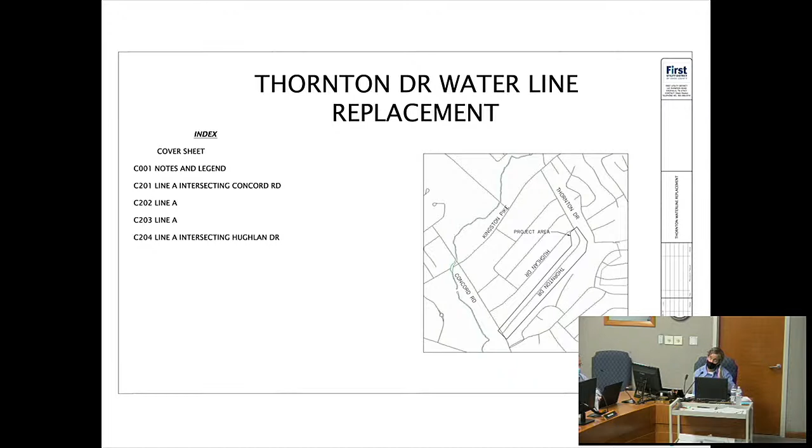This item basically involves replacement of an existing 6-inch PVC water line along part of Thornton Drive, from Concord Road all the way down Thornton to where it starts to curve north toward Kingston Pike. You can see it there on the screen. It's being replaced with a new 6-inch ductile iron pipe, and First Utility District would be doing all the work. They would be boring a 2-inch HDPE water line across Concord Road to connect to the existing line.

Really all this project is being done for preventative maintenance of their water distribution system. There's a representative here from First Utility if you have questions. Staff recommends approval of this utility project, subject to coordinating erosion control and traffic control as part of the right-of-way permit, and then providing the town with an as-built of the replacement line, so that for future road projects or utility work we know where the line is and don't damage it or have conflicts.

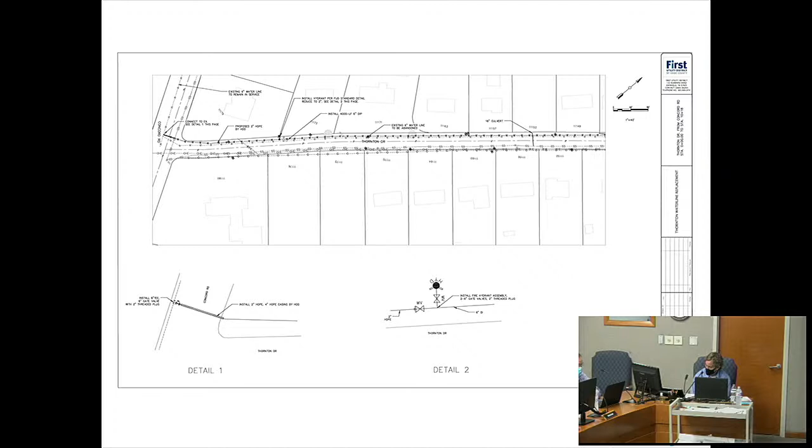So with that, if anybody has any questions, either myself or Edwin. I have a question. Okay, tell us who you are and give us an address of your business. Yes, ma'am, I'm Edwin Deaton. I'm in the engineering department at First Utility District, 122 Durwood Road. Thank you.

Yes, sir, my engineering question. You're going from the 6-inch to 2-inch back to the 6-inch. What's the rationale behind that?

We're replacing a 6-inch line. It's an in-kind line replacement from Hughlan Drive coming back around to Concord. Currently at Concord, we have a dead-end line that does not interconnect on the west side of Concord, so we're eliminating that dead end and just boring a short line across to make a loop. I guess what I'm trying to understand is why it's 6-inch to 2-inch and back to 6-inch.

Not to get too much in the weeds, but this is currently a 1-street wide pressure zone. We have 1 street on 50 PSI lower pressure. It's operated well and provided fire protection for a long time. We're going to replace that in kind, and we're eliminating the dead end simply to not have to go back and do flushing and maintain chlorine in that line. So we're simply connecting it with the tube because that's all we need to do to eliminate the dead end, and it's quite a bit cheaper than boring a 12-inch steel casing across the road.

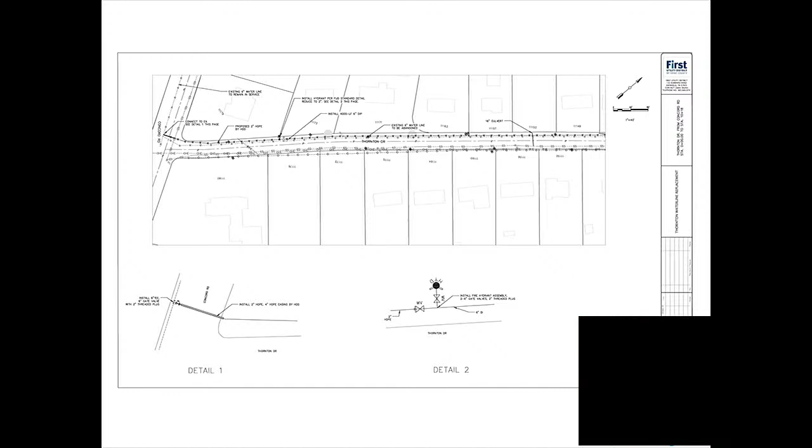Sure thing, understand. Will water service be affected for a certain time for the residents in that area? There will be scheduled outages just to swap the services over. The existing line will remain in service until the new line is tested and disinfected, and we're ready to transfer services individually for each customer.

And you'll be informing the customers of this? Yes, ma'am. Okay, thank you. And you're abandoning the other line after you get the new one up and going? Yes, sir. Okay. And Edwin, are you going to do new yokes and meters, or tie in to the old yokes and meters?

We will likely set new meters and boxes next to the old ones. Those have been there a long time, 60 years old, so we're going to go ahead and swap those over, and then we'll make the connection to the customer's existing service and pull the old box.

That's the other thing I was going to get at. It may really confuse a homeowner when they have 2 boxes in their yard. The ones we have now are old concrete, so we'll take those out, fill it with gravel, seed and straw it. Perfect, thank you.

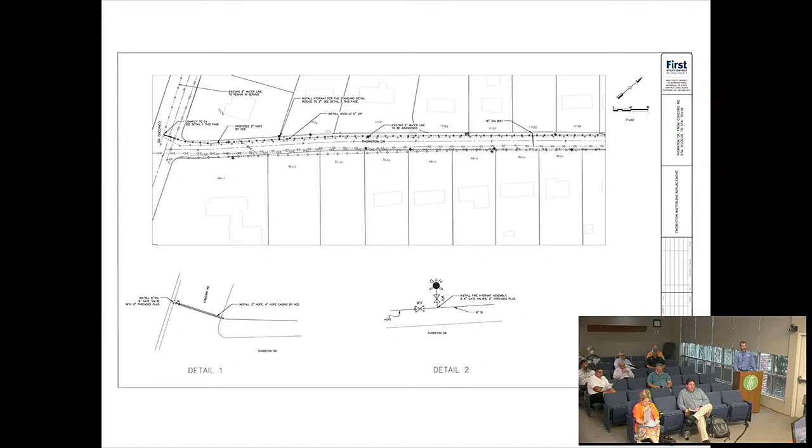Anybody else have any questions or comments? Move to approve with the subject twos. Second. All those in favor? Aye. Thank you.

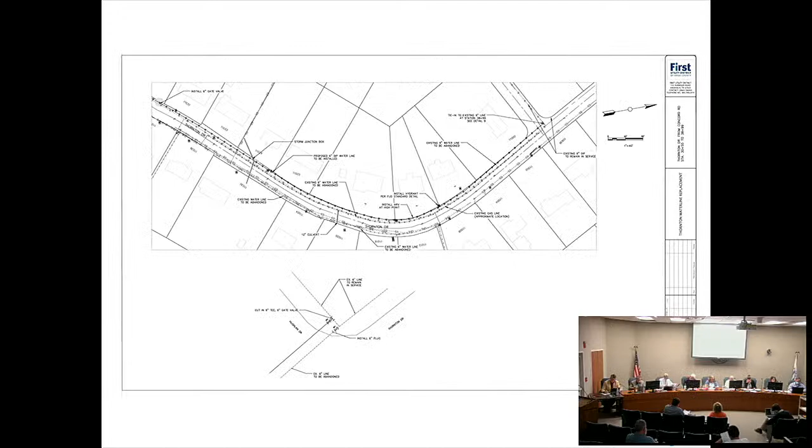Number 4, discussion and public hearing on a plan to install underground communication conduit to provide fiber optic Comcast cable to the Farragut Primary, Intermediate, Middle, and High School. Fulghum, MacIndoe, and Associates, applicant.

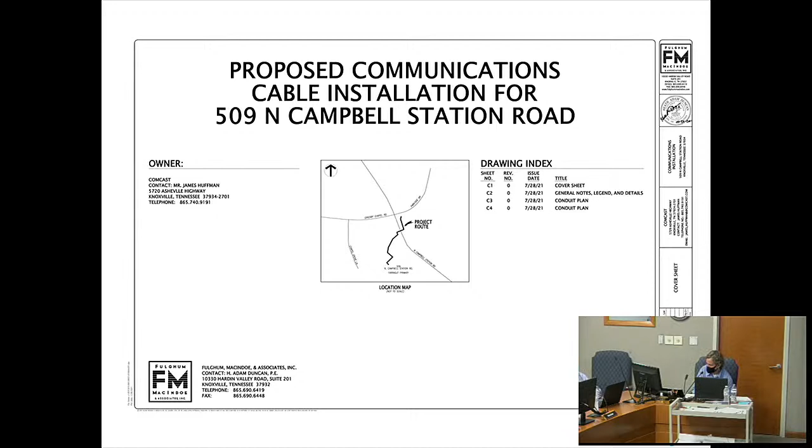This project basically involves installing a 2-inch HDPE communications conduit, Comcast conduit, to service the Knox County schools in the town. The first area, the primary school, is a pretty short section. They're extending it from Parkside Drive, boring under Campbell Station Road into the primary school property.

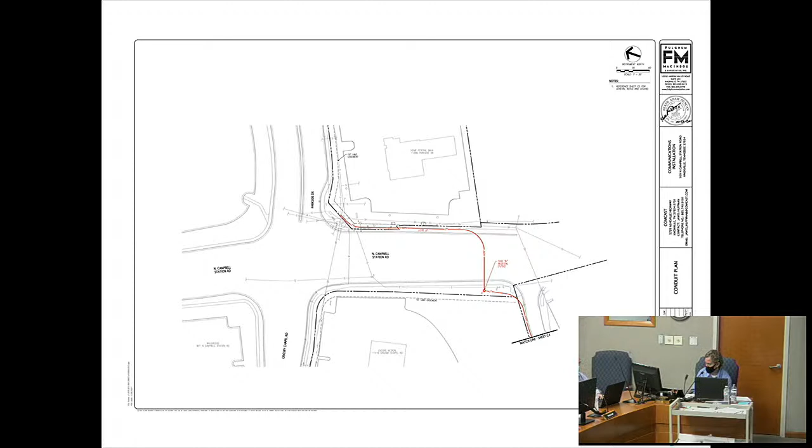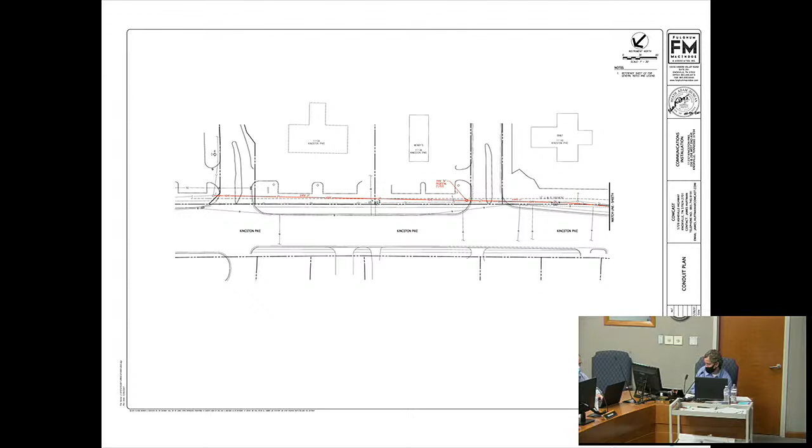On the other property off of Kingston Pike and West End Avenue, they would be coming in from 11126 Kingston Pike, going west along the south side of Kingston Pike and boring under Kingston Pike, then following the east side of West End Avenue up into the school property. There's a small section where they're going to have to obtain additional easements, I believe, on part of West End Avenue.

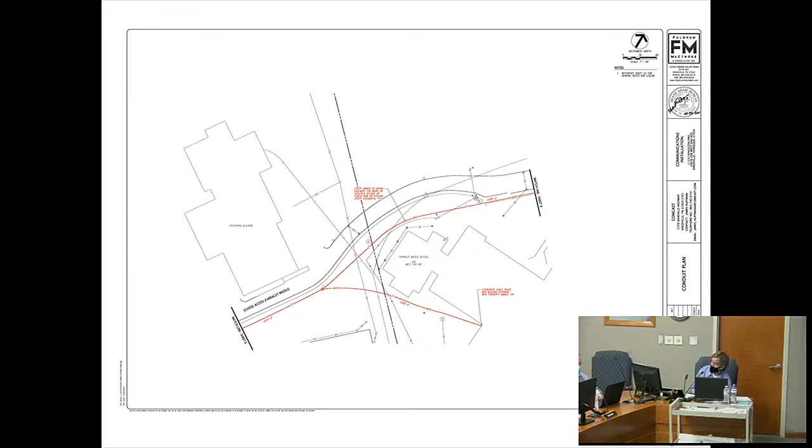But most of the work will be conducted either within the right-of-way or existing standard utility easements until they get into the private property of the schools. So it's a pretty straightforward project. Staff does recommend approval of this extension, subject to coordinating the erosion control and traffic control with the town's engineering staff as part of the right-of-way permit, and then providing as-built conduit location information for future coordination purposes.

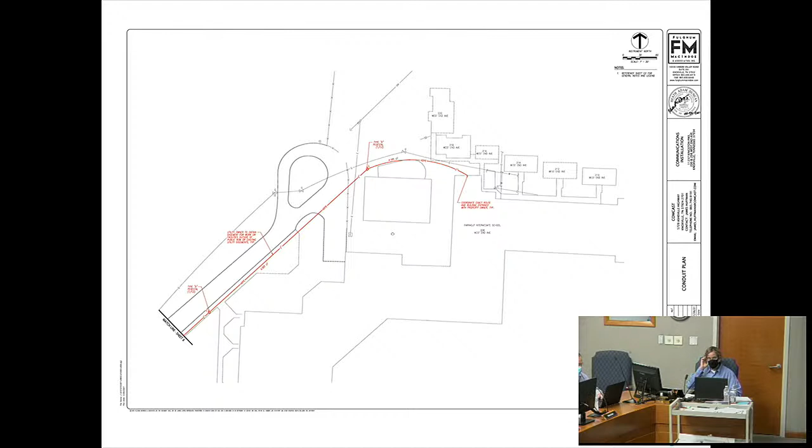Does anybody have any questions of Mark? Applicant? Yes, I'm Adam Duncan with Fulghum MacIndoe Associates, 10330 Hardin Valley Road. Do you have any comments first before we ask questions? No, ma'am. Does anybody have any questions of either Mark or the applicant?

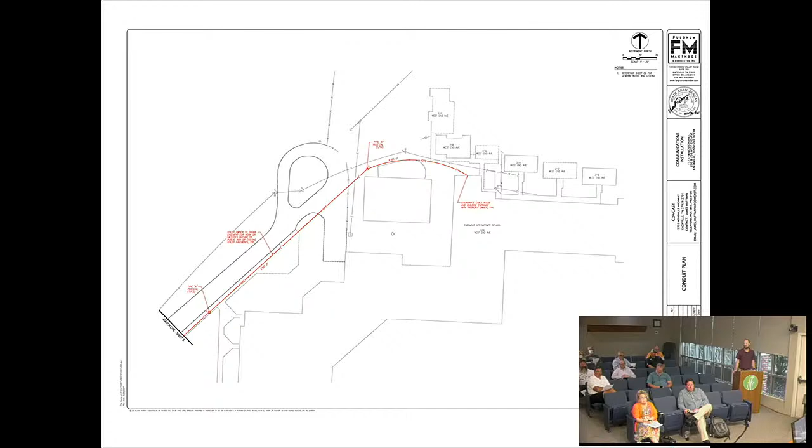If you guys are providing, I assume obviously this is going into the schools, the Comcast service is going into the schools, but you're going up West End. Are those business owners going to have access to a new service as well?

They should have access to that. I would have to confirm that with Comcast, but generally speaking, once a fiber is pulled in through this conduit, if they can serve more than one customer on it, it's beneficial to them. So it wouldn't be isolated necessarily just to the schools. Okay, that's all I had.

Just a warning, when you cross Turkey Creek, you're going to attach the conduit to that bridge because there's really no cover over culvert. It's a concrete clear span bridge. That bridge occasionally, once every 5 or 10 years, goes underwater, so think about during flood events how that conduit, you're going to be on the upstream side of it. Shouldn't be an issue, but if you're down below the deck of the bridge, that conduit is going to get ripped off during a flood event. It's going to be more prevalent in years to come because of silt buildup that's there now.

Is most or all of this you're boring underground as opposed to tearing up? That's correct. The intention is to bore as much as possible.

I noticed there's several areas where you're crossing or in proximity to gas lines. Do you have a reasonable confidence of where these lines are located or being able to locate them? They'll be marked by Tennessee One Call prior to construction, and then any crossings or anywhere they're not confident they can stay within that tolerance, we've got noted on the plan to pothole that utility to identify it before they try to bore through there.

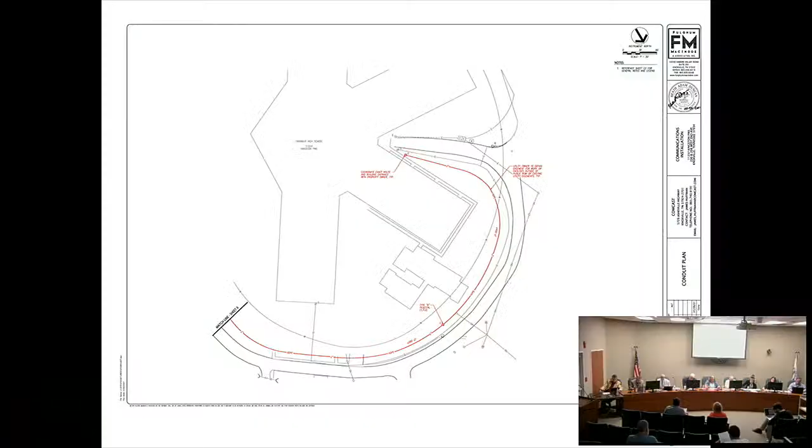Item number 5, discussion and public hearing on a re-subdivision plat for the Mary Smith property, parcel 079, tax map 142, 328 Boring Road, zone R-2, 4 lots, 17.83 acres, LeMay and Associates applicant.

This is a piece of property that's been before you all a couple of times in the past couple of years. Most recently, the 2 lots on the right side of the screen, lots 2 and 3, were platted, and then the remainder of the property was 15 acres of one lot. Now they're taking that 15 acres and dividing it into 4 lots. So they are requesting a variance from the 10% open space requirement associated with subdivisions in our subdivision regulations. We'll need to take action on that variance request before we take action on the plat.

The pedestrian facility would need to be constructed along Boring Road as part of this project, not along East Fox Den. There are no pedestrian facilities along East Fox Den or anywhere near there, and it's a local street, whereas Boring Road is a collector street that does require a facility.

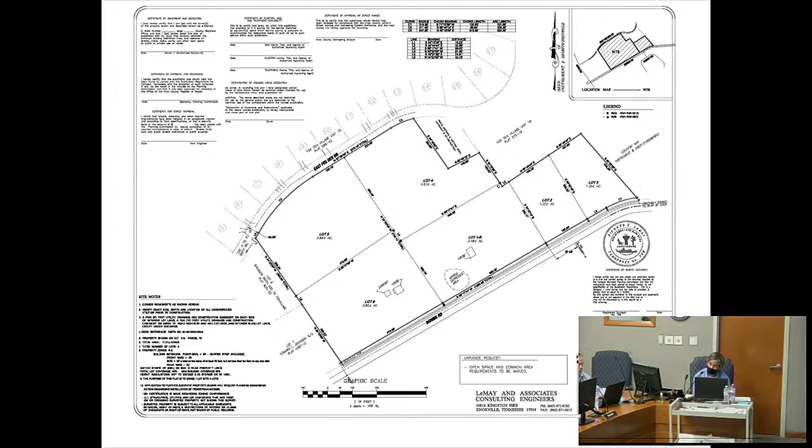Richard, will you tell us who you are? Yes, I'm Richard LeMay, 10816 Kingston Pike, and I'm the engineer surveyor for the property, and I'm here representing Mr. Ball. I'll be glad to answer any questions that you have.

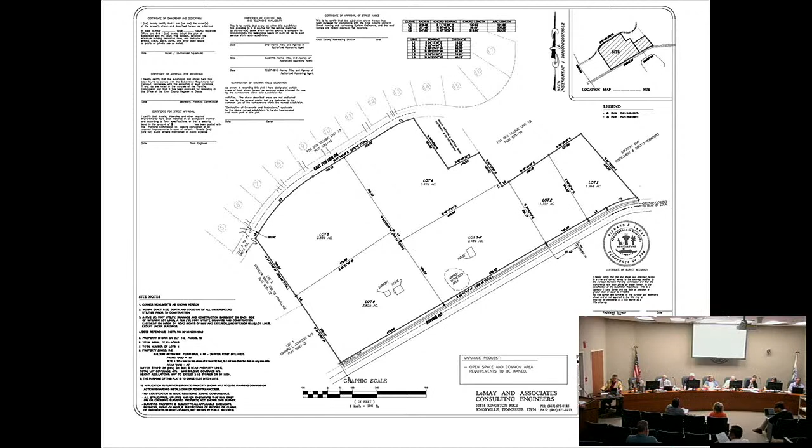Are you okay with all the conditions? Yes, we have no problem with those exceptions. What about that depression? We will field locate it. I guess the concern is when we got the notice to put it on, we just took it off KGIS, so we will field locate that depression and put it on there and dimension it from the property line.

Do we need a determination on that, on those closed contours, Richard? That'll be up to the owner. He can get it tested. We're just going to assume I don't think it's a sinkhole, but it shows up as a depression.

And until it really affects that lot — it's so large, and it's probably going to be a single family lot, and odds are somebody's not going to build right there up against the road anyway. So right now it doesn't appear to be a problem, but if it becomes one, I'm sure whoever purchases that lot will come back with a determination of whether or not that's a sinkhole. And most importantly, you've disclosed it on the plat, so I think you've got it covered.

In the past, the walking trail along Boring Road has kind of been a sticking point for the owners. The owners understand the walking trail is going to be required as part of this. Correct, yes.

Is there already a house on that lot? Yes — oh wait, no, I'm not on the lot with the depression. There's an older house on both those lots, the corner lot and the other one.

Okay, does anybody else have any questions for Richard or Mark?

Do I have a motion? Motion to approve the plat, subject to the 7 items as spelled out by staff. Second. All those in favor? Aye. Opposed? Thank you, Richard.

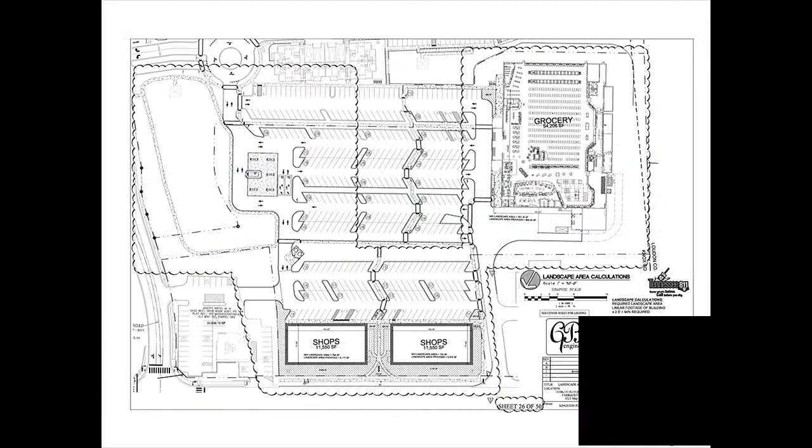This item is a follow-up to a workshop discussion that we had back in June. It deals with the second phase of the planned commercial development out at South Watt Road and Kingston Pike, the phase approved back in January involving the grocery store and the 2 retail buildings along Kingston Pike. If you remember, in June at the workshop session, the applicant presented some amendments to the site plan for this phase.

That related to an agreement to swap some land between this development and the Little Joe's property on the corner of South Watt and Kingston Pike. After reviewing those modifications with the Planning Commission, you all actually liked the modifications and were very supportive of moving forward with that.

So they've had a change in engineers due to some very unfortunate situation, but basically what they're trying to do now is proceed with the approval of the site plan for Phase 2. They've made some modifications to the Little Joe's.

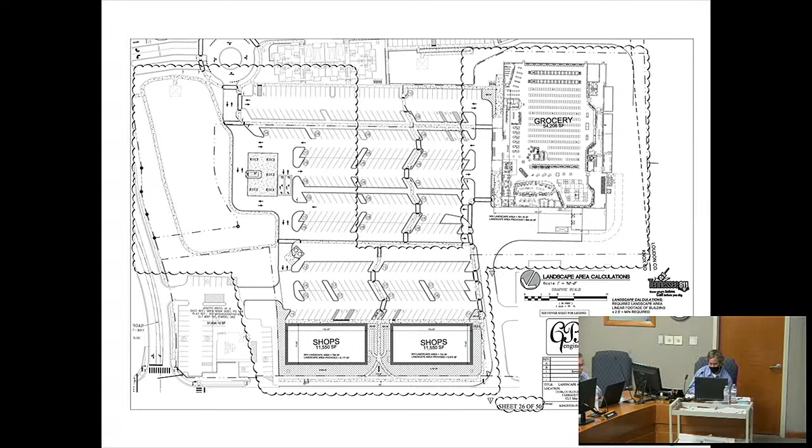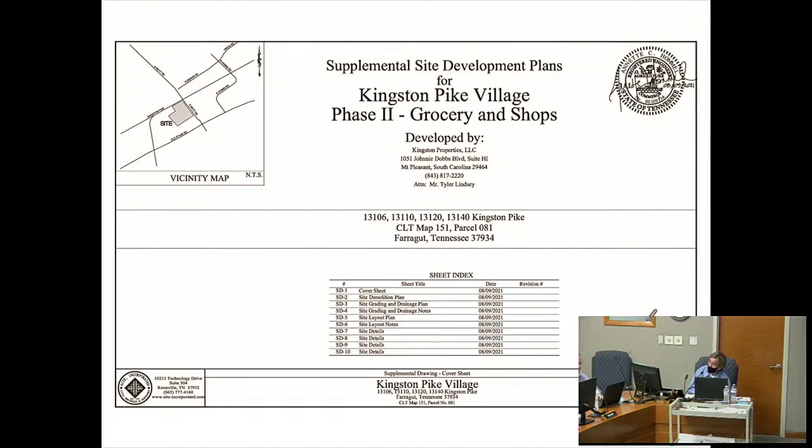Then there's a supplemental set of plans that deal with some changes occurring to the Little Joe's property in relation to this development. One of the changes we talked about at the workshop session is they have agreed to remove the existing access onto Kingston Pike. So now you will access Little Joe's either through their development or off of South Watt Road. That's, from the staff's perspective and probably TDOT's perspective, a very good change to the plans, much safer, because that existing access is very close to the intersection.

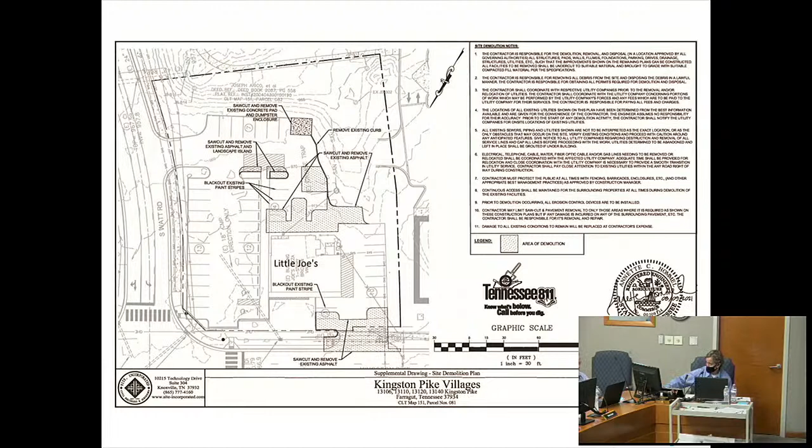And really, like I said, at the June workshop, the changes that they are proposing seem to be very well received, and the staff does recommend approval of the site plan for Phase 2, subject to working with the project engineer on addressing the 13 subject-tos.

This is a little bit, we're going to have to, and we are certainly willing and want to work with the engineer that's taken over this project, because they've kind of inherited an awkward situation. So there's some of the plans that they really can't change or don't want to change, and they're just going to have to cross-reference them so that we understand where the plan sheets are that people need to look at to find the things that are changing. It really won't affect anything about what you approve. It's just a matter of trying to cross-reference the overall plan set so that the contractor and the staff understand what they're supposed to be doing.

So with that, we do recommend approval of the site plan subject to those 13 items. Is the applicant here? Or a representative?

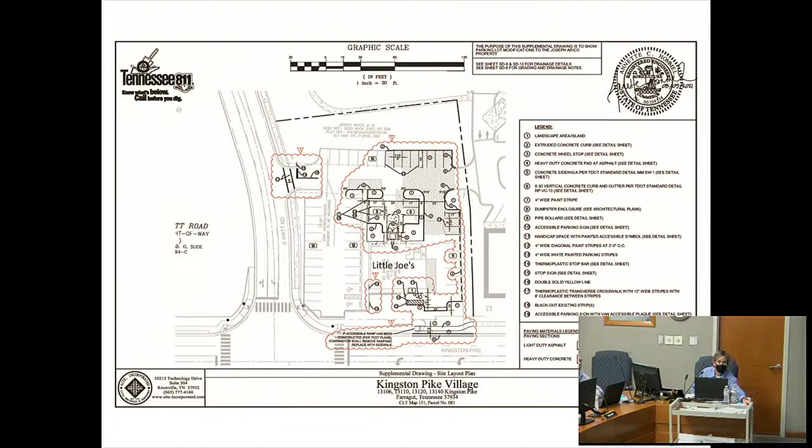Good evening. Name's Tim Kirkendall. Address is 245 Birch Street, Blountville, Tennessee. Here representing the developer.

Does anybody have any questions of either Mark or the applicant representative? Mark, just for clarity, we're taking out that access point from Kingston Pike into Little Joe's — is that going to be a sidewalk, will we continue that sidewalk straight across? Yeah, there will be a sidewalk that will continue on to South Watt Road.

Do you have any issues with the subject-tos that we have? We do not. So you can whittle these down pretty quickly? Very, very quickly. Those are pretty minor items. That's all I got. Anybody else have any questions or comments?

Do I have a motion? So moved. Second. All those in favor? Aye. Opposed? Thank you, sir. Thank you for coming, and thank you for your patience on this one. Thank you.

Item number 7, discussion and public hearing on a line of sight evaluation associated with the screening requirement for outdoor storage and sales related to a site plan for Moses Watersports, parcel 176.02, tax map 130, 11470 Outlet Drive, zoned OD-RE, 6.8 acres, urban engineering applicant.

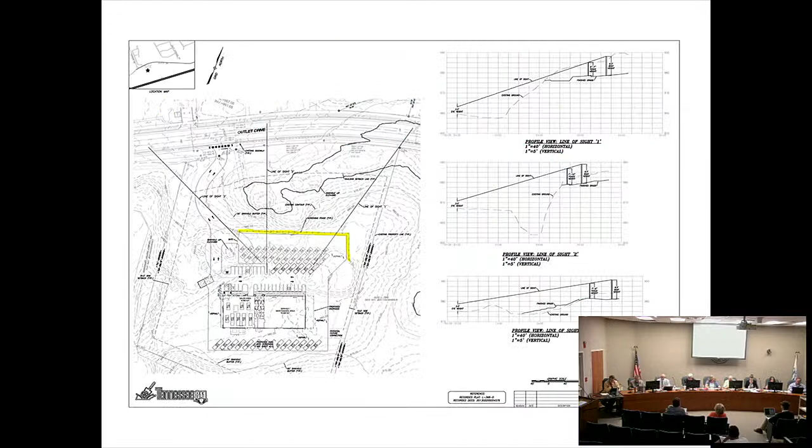This item was reviewed last month when we looked at the overall site plan and conditionally approved it. But one of the items outstanding that we asked the applicant to take a closer look at was the screening fence required in this zoning district for outdoor storage and display. The original fence was 4 feet in height, and there was some question from both the staff and some of the commissioners as to whether that was tall enough, since these boats would be on trailers in the parking lot. So they've done some line of sight analyses from Outlet Drive looking into the property, taking a 3.5 foot eye height — basically from car level, which is pretty much a standard — to an overall boat height of 9.5 feet.

And what they found with these three diagrams was that a screen fence would need to be in a range from a low of 6 feet 7 inches to a high of 7 feet 10 inches in order to properly screen the material in the parking lot.

So they're proposing an 8-foot screen fence constructed of wood, colored to match the dark bronze on the storefront. There would be intermittent wood posts roughly 8 feet apart, and anchor posts roughly 50 feet apart at about 16 inches in width, and those would be covered in a veneer of brick that would match the brick on the building.

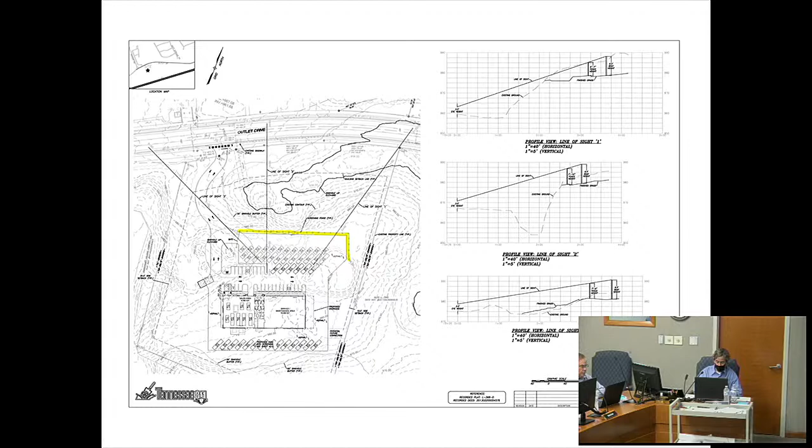Does anybody have any questions on that? On those brick structures, every 50 feet, do they require some sort of footer? If so, what? I do not know the answer to that. I don't know if Chris knows that or not. They will require a footing. We'll need to coordinate with the architect and his structural engineer, but yeah, I'm sure something that large will require a footing. We probably need to know that in the future.

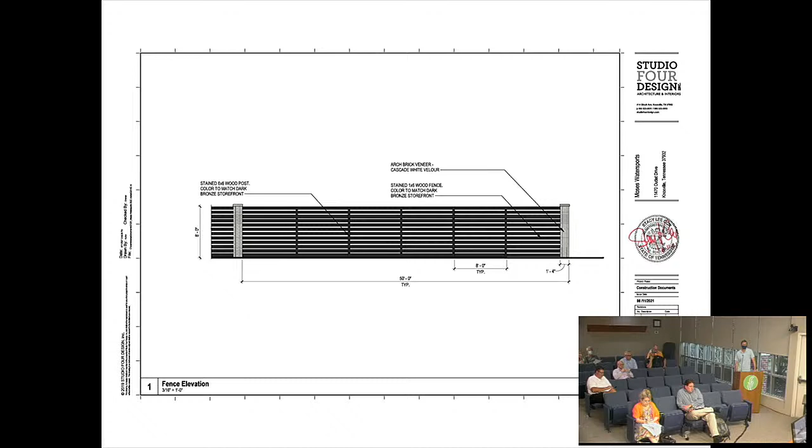Chris, tell us who you are and give us an address. Apologies, Chris Sharp, Urban Engineering, 11852 Kingston Pike. Thank you. Does anybody else have any questions of Chris?

Ready for a motion? I move to approve. All those in favor? Aye. Opposed? Thank you all. Thank you, Chris.

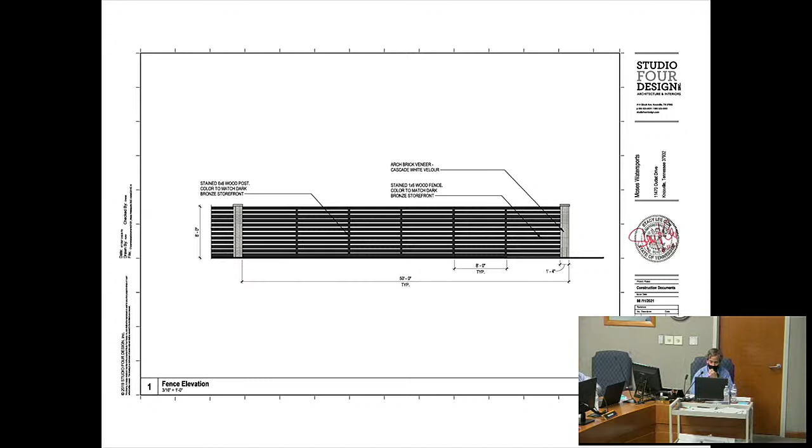I think one thing we might want to look at in the future is whether y'all are comfortable with products like that being stored outside in these zoning districts, whether it's this one or the C2 zoning district on the interstate, whether it's cars, RVs, trailers, or boats. That might be something to look at in our language and see if it achieves what we want to see in that part of town. So just mentioning that. I think you know my feeling on that, I'm very much into looking into that.

Move on to item number 8, discussion on a concept for outdoor storage and display of farm implements and lawn care equipment on the property at 13127 Kingston Pike in association with Ag Pro, formerly Farragut Lawn and Tractor, at 11113 Kingston Pike, Zone C-1, Stuart Ritchie, applicant.

This is actually just being presented to you all, kind of very preliminary feedback before a site plan is presented. We looked at this at the staff developer meeting on August the 3rd. But basically, Ag Pro has bought the Farragut Lawn and Tractor business, kind of over in the Dixie Lee Junction area, and they are wanting to expand the business.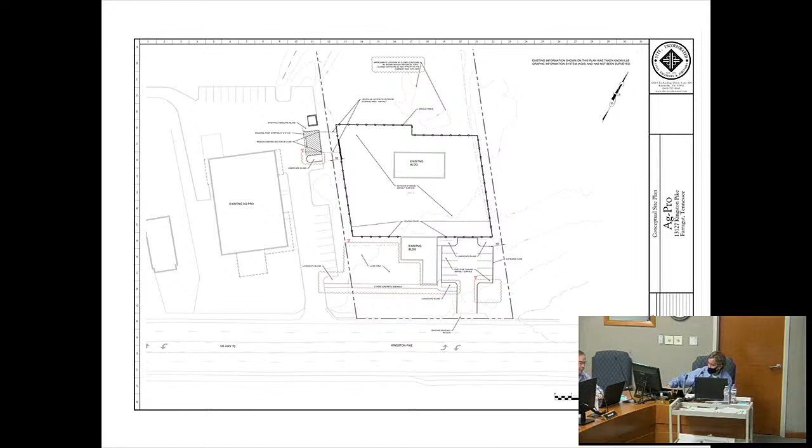Does anybody have any questions for me? The owner is here, Stuart Ritchie, if you have any questions for him. What eventually are we approving? I know this is just for discussion, but what are we eventually approving?

Eventually, we would approve a site plan because they'll have to have a paved area for storing their merchandise and for the parking. They would have to meet our requirements in the parking and loading section of our zoning ordinance, and the fence detail. And obviously, part of that's going to be stormwater considerations.

How are you detaining the stormwater, because you got more hard surface out there with this, and then just converting some of the existing hard surface areas to grass, kind of in the area where they did show display, just to the north of the sidewalk that goes over to the employee parking area. So, kind of a landscaping plan for that.

It'd be kind of a simple, scaled-down site plan, but it would still involve stormwater erosion control, some landscaping, and just a general site plan. Don't believe there would be more than an acre. I don't know if Annette, if you know, they wouldn't need a notice of coverage, would they?

Don't know yet. If they need that, they'll now have to have the erosion control sheets, the 3 different phases for erosion control. But we also need screen fencing. Yeah, that would be one of the elements for the detail sheets.

So the site plan that we might see, does that include the whole property or just within the fence? Will the parking lot out front be upgraded, because it's kind of half gravel and half 20-year-old? Everything that you see there will be brought into what we're showing on the plan. The only thing we won't be touching is the buildings. That's the eyesore.

It'll look better, though.

For one, I'd like to see you be able to use that front area as a display area. I know that's not on the agenda tonight and is for later discussion, but it seems like it would make sense. As long as there's some continuity between the two properties where it looks cohesively like it's part of your dealership, I think it makes sense.

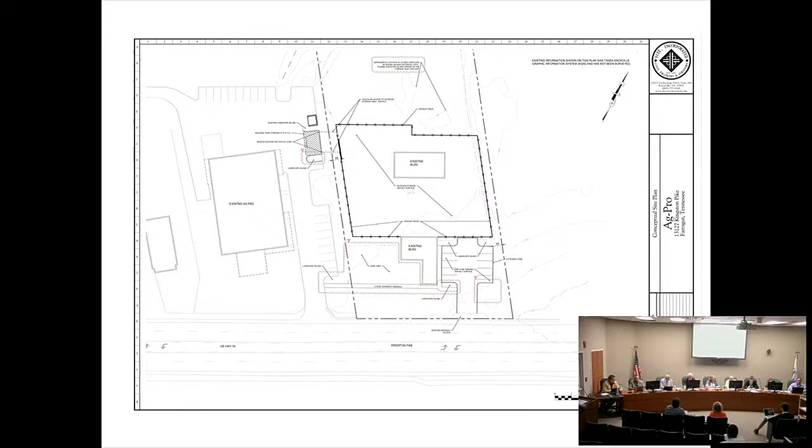My question is, the storage of the items that you're selling will be behind the fence, is that correct? Yes, ma'am, that's correct. And will not be visible from the street? No, ma'am.

Do you have an idea what kind of fence you're planning on? Yes, ma'am. We've talked about one similar to the area they have now on the former FLT property. It would be a black chain link with some black mesh material going across the front so that you could not see behind it.

Anybody else have any questions or comments? As I've said many times before, my objection to outdoor display like this is we cover the whole town. Even though zoning may be different, if somebody in another section of town, closer to Campbell Station or something, is interested in doing something with display, then that's a problem for us. I hate to open up Pandora's box too much with this sort of thing.

Does anybody else have any questions or comments? The outdoor display is only during business operating hours, correct? Right, they have to bring it all undercover. Basically, anything in the front yard is just during business hours.

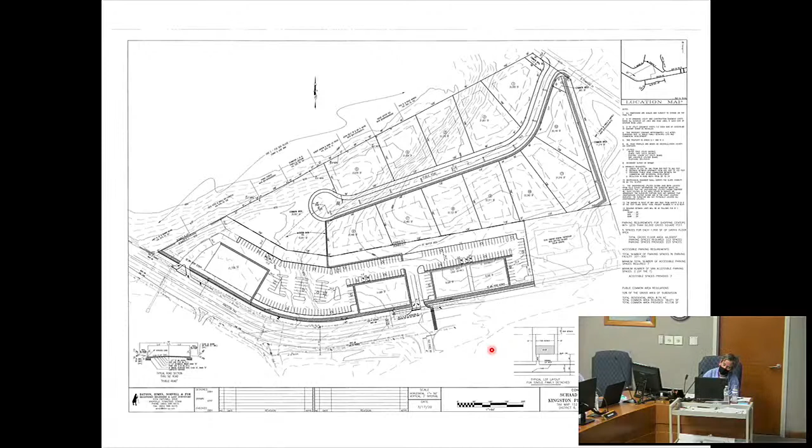Am I seeing a deceleration lane on the right turn in? Yes, it's just small print. The town engineers looked at that, and I believe he was okay with that. The comment we had was to try to make that more pronounced on the initial submittal so that it really dissuaded somebody going eastbound from trying to make a ridiculous turn in there.

I just worry about the sight distance for some idiot coming around that curve. But if you had a deceleration lane there, you can get them out of the mainstream of traffic — at least they're out of the flow of traffic. Yeah.

I think every year our right-in, right-out designs get slightly better. We've learned what really doesn't work, and each rendition we do gets a little bit better. This one would be tough to make that turn. Like you said, Mark, stupid people do stupid things.

But I think it makes sense, and obviously this is still conceptual, so there's a lot of design to go into it. That decel lane's probably going to end up being about 150 feet long by the time it's done, and you probably need that with cars coming around that curve going 50 or 60 miles an hour, even though it's a 45-mile-an-hour zone.

Some residents want to speak as well. I have two, if you're ready for them. Go ahead. The first one is Stacy Walters. After her, it's Gary Malden. Gary, if you'll go ahead and get back up there.

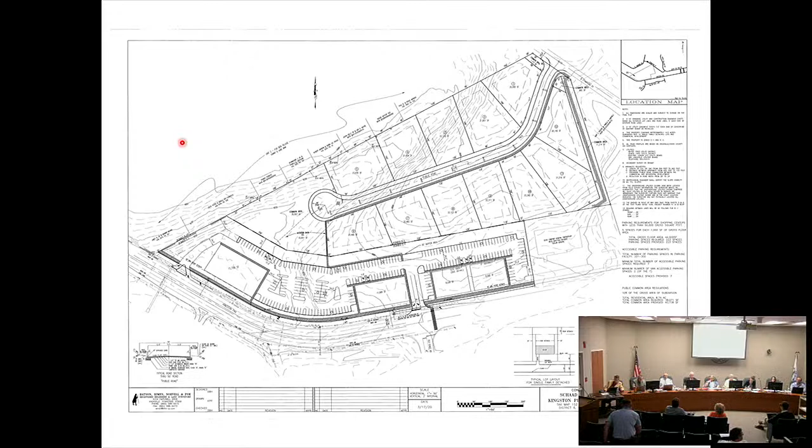All right, my name is Stacy Walters. I live at 124 Champions Point.

I think my first point is I would like a better understanding of how a new subdivision like this could connect to an already existing subdivision like Fox Den. If you look at that map where the residential road will come out, our house is directly opposite, exactly where that red dot is. We pay HOA fees to maintain the front of our neighborhood — if this neighborhood is going to use that entrance, will their HOA fees also go to support that front entrance? But more importantly, the issue my family has is we have significant safety concerns about where that road is proposed to come out in front of our house.

And if any of you have not been there, I would encourage you to come drive that road, specifically drive it from St.

Andrews down Champions Point to the intersection of North Fox Den. The problem with that area is by North Fox Den, you have a very tight curve, which can be dangerous when people speed, and people speed there all the time.

More significantly, there is a blind hill to the north up there. Our firsthand experience with that hill is we walked our children back from the bus stop every day, specifically because it was such a dangerous hill. You cannot see cars that are coming over, and they can't see you. So we would have to walk on the other side of the street with our children and have them be prepared to jump into the neighbor's yard in case a car came.

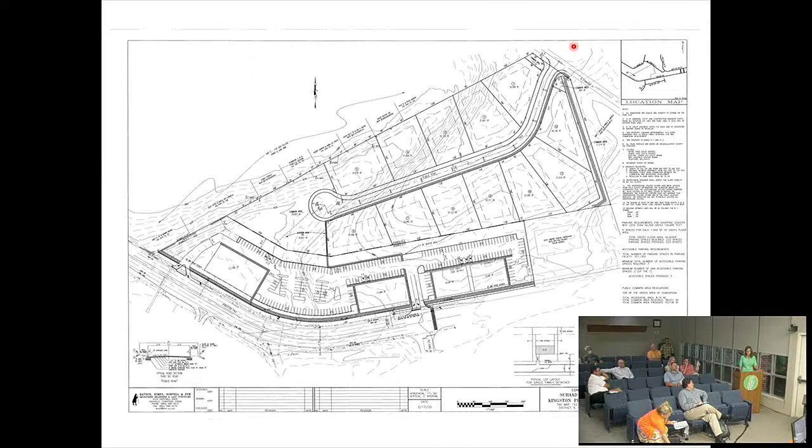I am not a planner, so I'm not really sure how this could be accomplished. But if there was any way that the entrance to that subdivision could be moved down a little bit so that it's more opposite our driveway, or the more flat area where our yard starts across the road. The reason why is because as cars go really fast over that hill, where that proposed entrance is, they're not going to see cars pulling in and out of that entrance.

And the people going in and out of that subdivision are not going to be able to see the cars pulling out either. From a firsthand perspective, we pull out of our driveway every day. We have a child that has a learner's permit, two more on the way. When you make a left out of that driveway, you better be sure no one's coming, and you better push the gas pedal pretty hard because people do fly over that hill. That's our main concern.

I know that there was a quick survey, or engineering study, I'm not sure what the right word is, but an engineer came out and looked at that area and determined that based on 25 miles per hour, someone coming up over that hill did not cause a line of sight issue. I can tell you, people don't drive 25 miles an hour down that hill. I invite you to come sit with me on my front porch and watch them speed down that hill.

I want this group to know that we're not opposed to the development itself, and we appreciate how they've tried to protect the integrity of the woods because the trees back there are mature and incredibly beautiful. But it poses a significant safety concern as it's designed right now. I would just ask this group to reconsider how that could be rerouted so that it's more safe. Also, if you have not driven that road, come out and experience it yourself. Thank you.

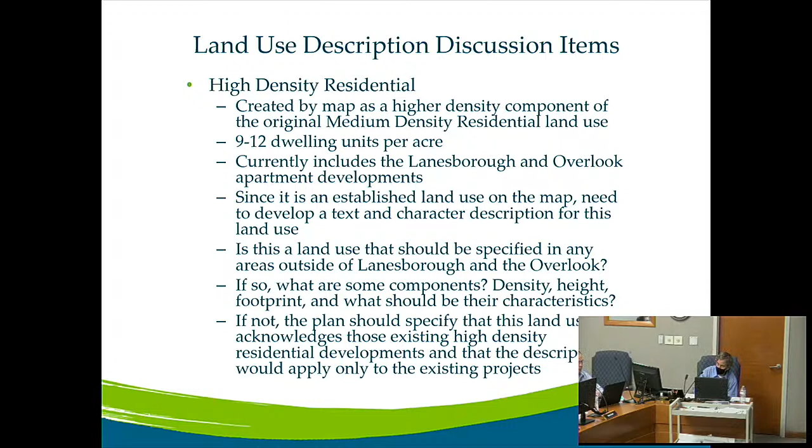We kind of heard from some people in the community that really didn't want any more of these kind of larger scale apartments. But if we do provide for that, I think we need to look at the typical things in the description, maybe the density, the height, footprint, maybe some other characteristics. And if we don't, we really just need to describe that in the plan, that basically what's mapped is what the community wants at this time. If they want to provide for that in the future, they'll have to amend the text at that time.

Abutting or having direct access to a major arterial and adjacent to non-residential developments. And that's a big one, adjacent to non-residential developments, because that's been a point of contention with the apartment projects, the ones that have been proposed with rezonings that abutted existing residential communities, like the property to the west.

If we were going to look at that land use and try to add some provisions, if the community wanted more specific criteria associated with high-density residential, or what does that really mean, maybe you up the masonry percentage even higher than it currently is. Maybe you require certain segmentation of the building to break it up into the appearance of being smaller, more house-like looking buildings, as opposed to larger scale, commercial looking apartments.

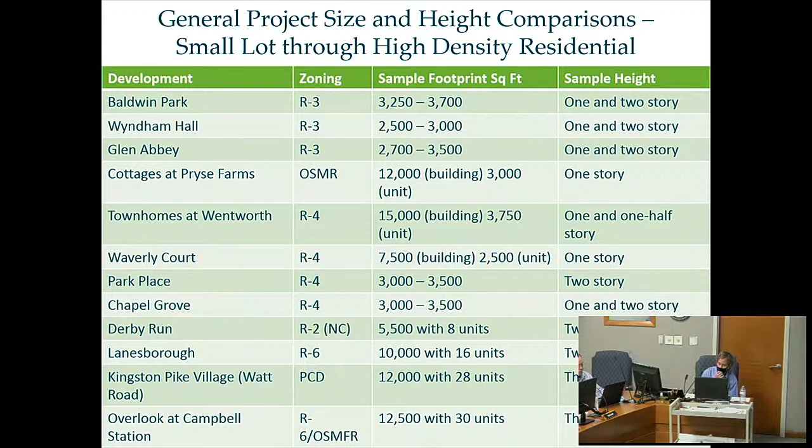So that's something we would need to think about when we're looking at language for high density residential. Medium density residential, we do have descriptions for that currently in the plan, but staff feels like we need to revisit that and look at it a little bit closer.

With medium density residential, we did have a lot more areas of the town mapped for that land use when the plan was updated in 2012. Some of those areas have been developed and the future land use map has changed, like the Harville property off Virtue Road, the Ivy property, the Swan Farm. All those had medium density residential, but they're now different kinds of land uses and different types of development.

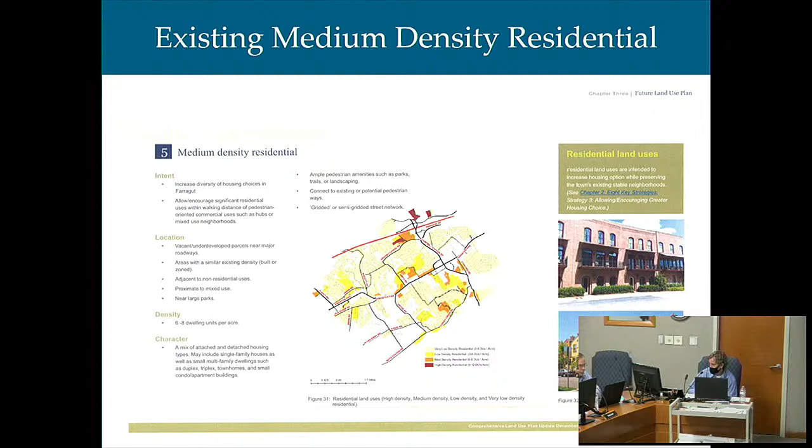So just looking at that existing language, the medium density residential current character description really includes about any kind of housing you can think of. It's pretty broad, from single-family detached to pretty much large-scale apartments, and that was to fit that 6 to 8 dwelling unit range.

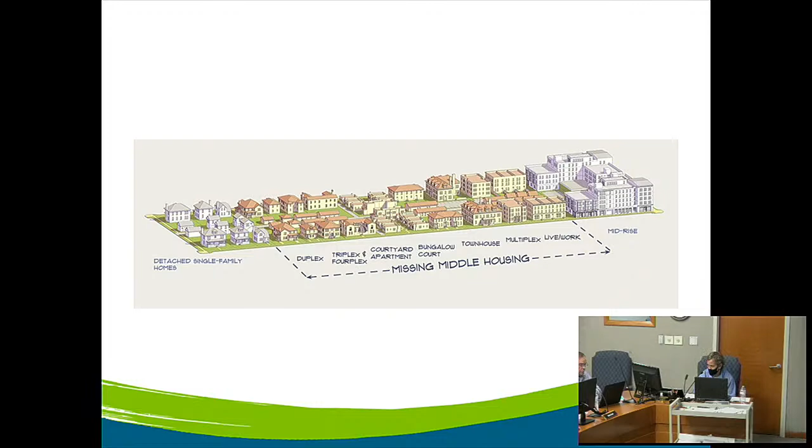So really, that character probably needs to be revisited, maybe even embedding some of the missing middle housing options that we looked at earlier. Just to rehash that, that's basically the housing that falls within the range of single-family detached and larger scale multifamily. It's the housing products that fall in between that.

And that would include a lot of the townhomes, duplexes, quadplexes, like the cottages at Pryse Farms. Maybe even small lot single family could fall into that, and that's something we could look at.

Cottage court that we looked at in the workshop would, to me, potentially fall under the medium density residential. And this would be a kind of land use from my perspective that could be a really good transitional

land use from lower density residential to some kind of non-residential, whether it's office or commercial, or within the mixed-use town center or mixed-use neighborhoods as a transitional component, or even on smaller infill lots that are in areas where it's not practical to have a traditional single-family detached development -- it's probably not marketable. Maybe it's near a commercial area or office area. So that might be an area where medium-density residential might be a good fit.

And we looked at these at the workshop too, some of the different housing products that might fall in that medium-density residential range.

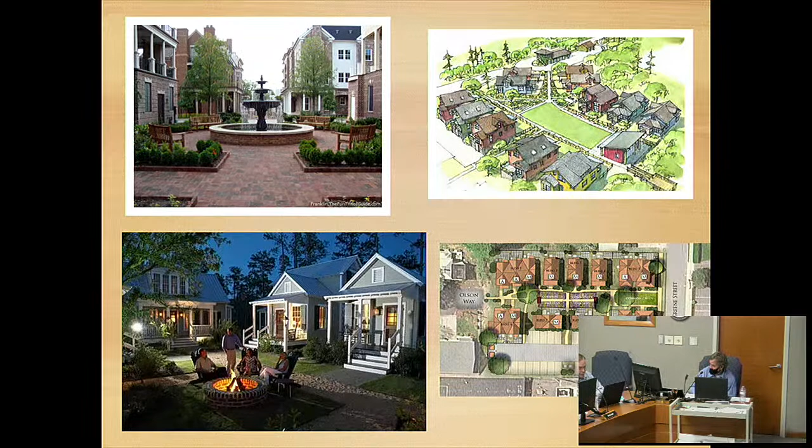I think, like I mentioned at the workshop, to me the real important thing with all these land uses and what we end up doing with the descriptions is, first of all, we need to get a lot of community input on it, and then really try to think about whether the language creates the vision that the community wants to see. Of course, the language in the plan is going to be much more general. It's not going to have the specifics or any requirements, but it's going to lay out the general vision of what the community sees at that moment in time as what that land use should look like if it gets built on the ground.

So that's kind of an overview of this item. I don't know if any of y'all have any questions, observations, or thoughts.

Yep, I'd like to start a discussion, and I'm probably going to shock some of you with this. But after working on the steering committee back in 2012 with the land use plan, and polling a lot of friends in the town of Farragut, I think I am ready to throw in the towel on high density designations -- meaning the high density apartments and multifamily projects. I've been an advocate of it. It was a big part of what I believed in and what I believed I heard in 2012 for

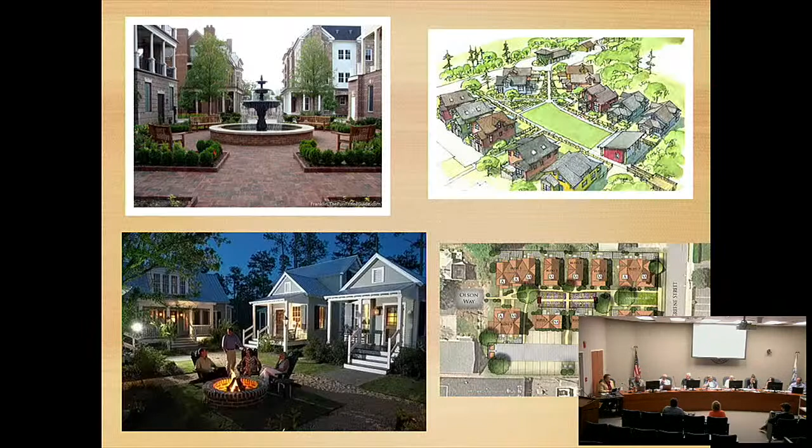different choices in housing. But talking to a lot of folks that we hang out with, or we go to church with, or we see at Fox Den, it is absolutely overwhelming how many folks are vehemently opposed to apartments. So I think I'd like to have some discussion about removing high-density residential as a classification on our land use plan, and see if that's something we'd like to entertain.

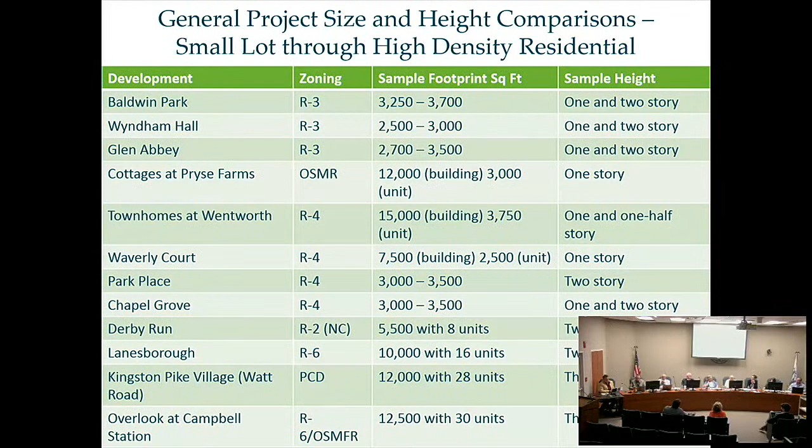I was going to say the same thing. But it exists. I know it exists. Well, it does exist. But the key is, from where I'm coming from, is the fact that, like Noah,

we went back and we figured that we needed some variety of housing in this community, and by golly, we've accommodated that. Big time -- we've got it on North Campbell Station, we've got it on the west end at Watt Road, and we're really going to have a great development in the town center, I feel.

I think so too. People, eliminate the emotion of it, but enough is enough. We already dealt with the Ford property, saying we basically didn't like the way that was done -- shoehorned in there. So I'm willing to say right now exactly what you said.

That's why I wanted to start the discussion, and you guys know where I've stood all these years on this. I've been probably the biggest advocate for it when we did the Watt Road project, but I think I'm done. I think the community has told me and convinced me that we've satisfied that market.

Yeah, they just don't want any more. I agree. I'm okay with it.

What we have is very well strategically located throughout the town. We have checked that box, but from my perspective, it is a use in our town currently. We need to define it, stick a pin in it, and be done with it. It's a use in our land that exists and needs a definition. No, I'm talking about eliminating it, removing it, and putting something more in its place.

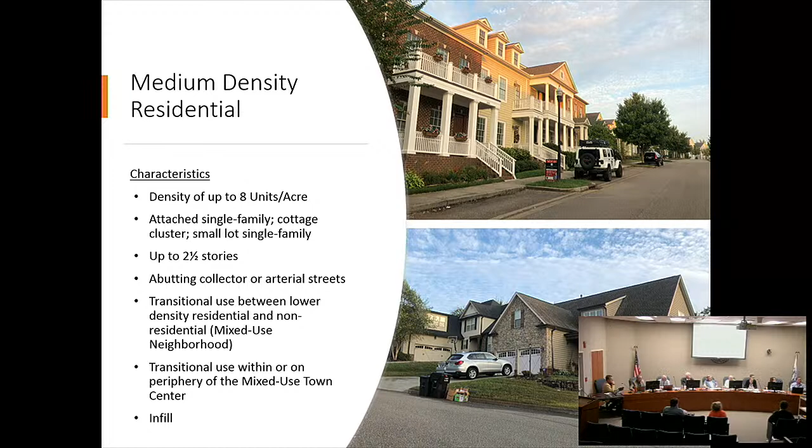Can we schedule another workshop then for the next meeting? I don't know, do you think we need one, Mark? I think the people would like for one. And once just they've had a focused chance to talk, focus on that one area? Yeah. Yeah, that'd probably be a good idea.

I mean, we put a lot of foundation work down tonight for that. And I do think we need to focus in on one area at a time and not overextend ourselves. Use that as the focus area to flesh out this, get the overall vision from the people in that area suggested, and whatever that is, we'll figure out what we need to do from that point.

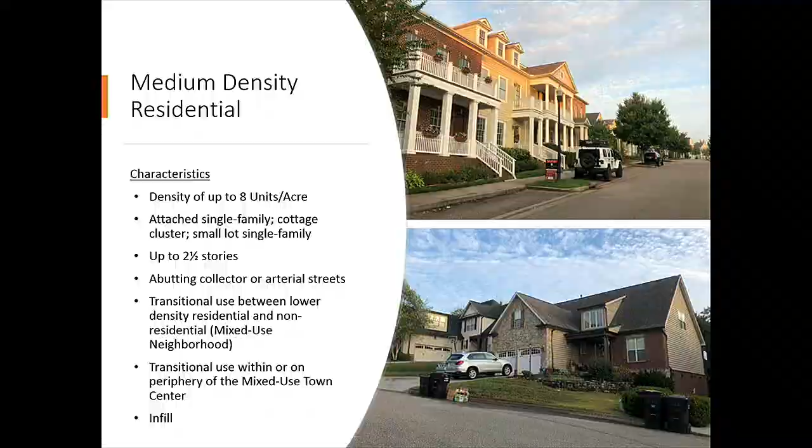Well, what I'm saying is, I'd like to do like we did with McPhee corridor and Walt Road corridor. I'd like to bring them in to have them, like a charrette, so that they can come mark up their maps. So that would be a separate meeting? Yes, that would be a meeting before our meeting like tonight. That was really the purpose of that workshop, was just to introduce some topics and some ideas and observations.

But we can't do that until we have some language around this medium density. They need some understanding, we need some language adopted around the medium density, because this is very general. This is not a zoning ordinance, it's a land use designation. I think them being involved in any kind of comprehensive land use discussion we have is a good thing. They were with the other areas that we covered, and I think we need to continue on and be consistent with that.

Oh, I agree, that's what I'm suggesting, but if we don't have language, a medium density land use designation language adopted first, and certainly whenever we have that, we'll have the opportunity for community input to help us with that language. What you're saying is we need a draft of something as a starting point for the discussion, as opposed to just plunging into a discussion. Yeah, we can't do the corridor study without language for a medium density residential land use designation.

I'm calling for the community to be part of that discussion, to solidify this language so that we can get the Boring Road corridor study done. But we can't do it without some kind of, I'm not saying that we do this, I'm saying that, but that's been done through workshops and through this process here.